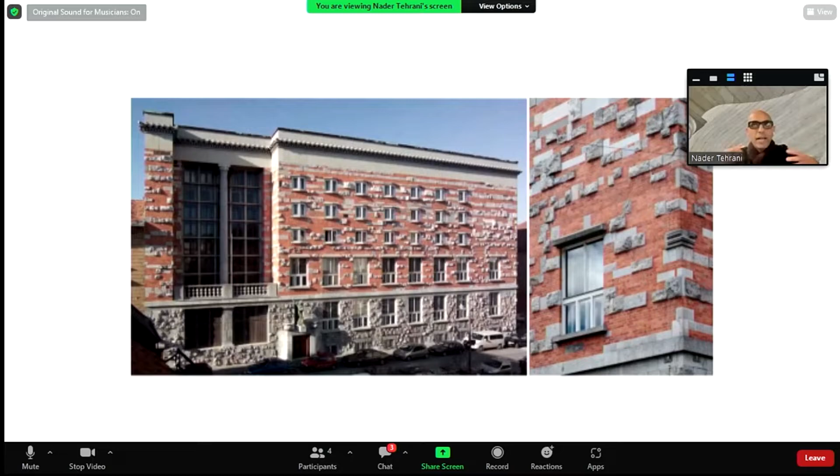I've always been fascinated by the idea of monomateriality, to radicalize architecture through a catalytic detail, the singularity of a certain medium on the ground, on the walls, on the ceilings, pushing them to certain limits, as we can see in Lewerentz. In the rustication of the library walls of Plečnik, we can also see the way in which that stone migrates to the top of the building, allowing us to understand that the catalytic detail isn't an instance in the building, but in fact is its entirety.

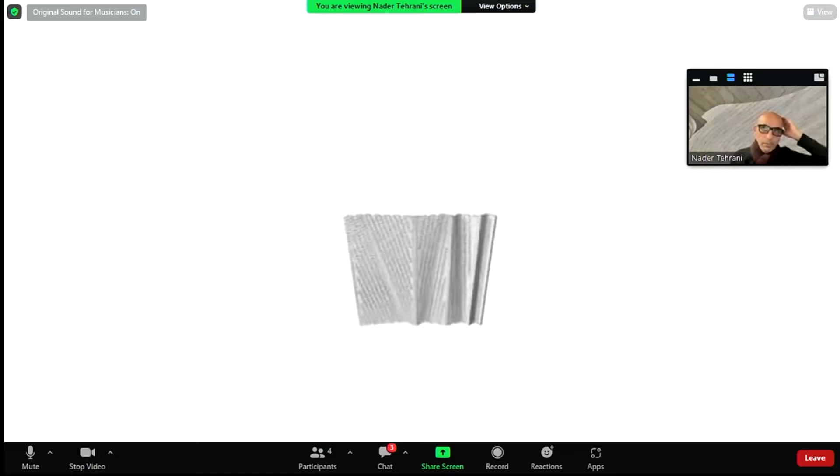In the context of Casa La Roca, we imagined a situation in which we worked not so much with the running bond, nor the Flemish bond, but what we call the variable bond, that is able to slide on the horizontal axis and corbel at the same time. By doing so, we are able to not cut even one brick, but even more importantly, to allow for the passage of light and air into what is a structurally stable wall.

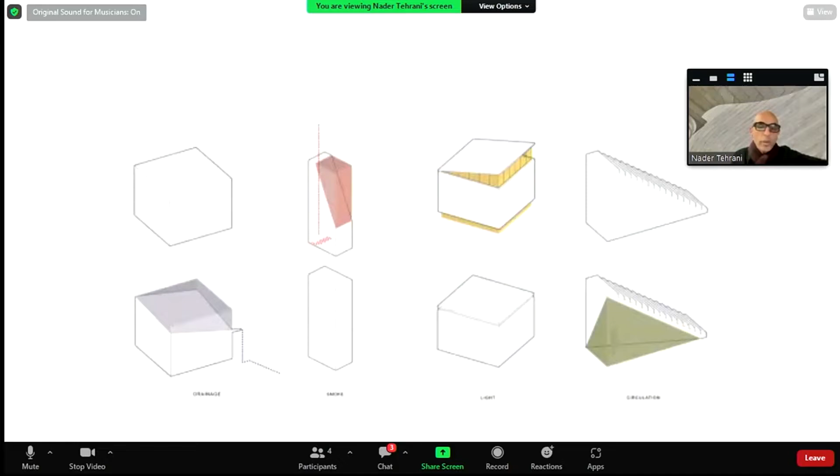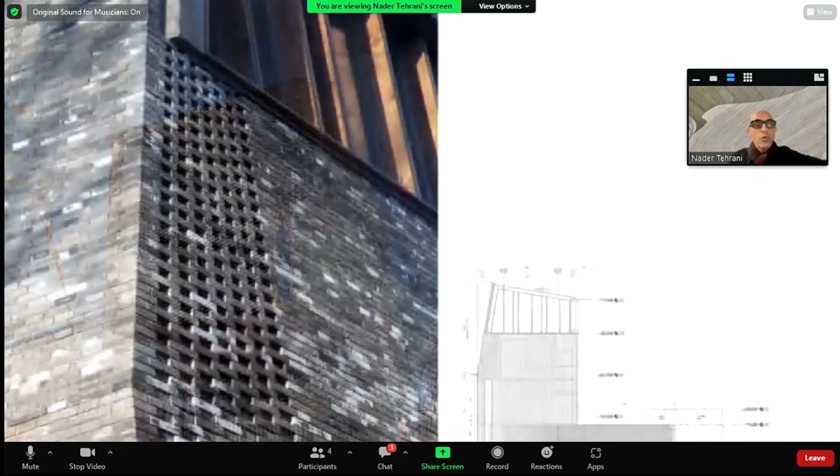Expanding on that theme, we realize this can also become a vehicle through which program can get figured and formed. In the Tongxian Art Center, we're able to take on the requirements of water circulation, smoke, and physical circulation to envelop certain concrete masses, using the brick as formwork to give figurations to an otherwise abstract volume. In this case, the slope of the roof of the gatehouse is really indebted to the compression of the variable bond, tilting the entire facade in relationship to the roof, which propels out the water.

In turn, that variable bond exposes itself for venting on this side, or the turning of a corner on the other side. Obviously, the modularity of the brick, when transformed in scale to some other context, becomes a totally different problem. In the context of CLT, or cross-laminated timber, we realize that the craft of the brick is transformed into

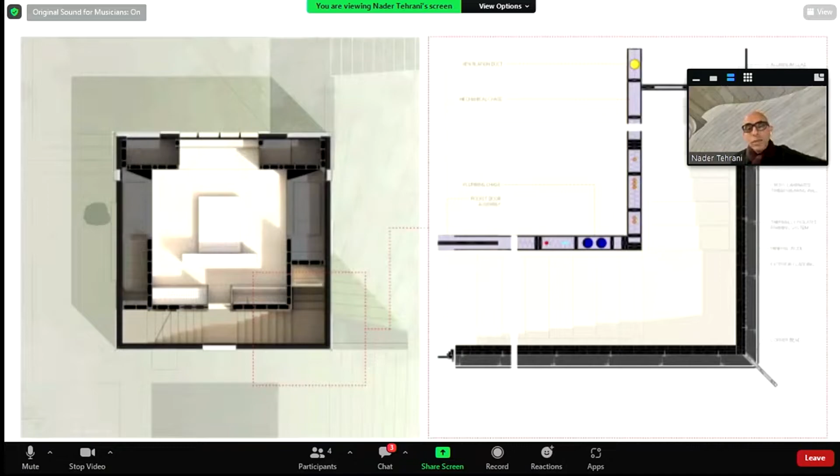planks that are 8 feet by 30 feet in the context of the Connecticut house, producing a monolithic mass of CLT that acts as insulation on the outside, with a sister of balloon framing on the interior, precisely so that it can house all of the systems, be they HVAC, electrical, or otherwise, in a building that wastes absolutely no space.

The circulation not only goes around the building, but gives rise to the poché spaces under and over the stairs, where bathrooms, bunk beds, closets, showers, and all of that take place. A building with no fat, as it were,

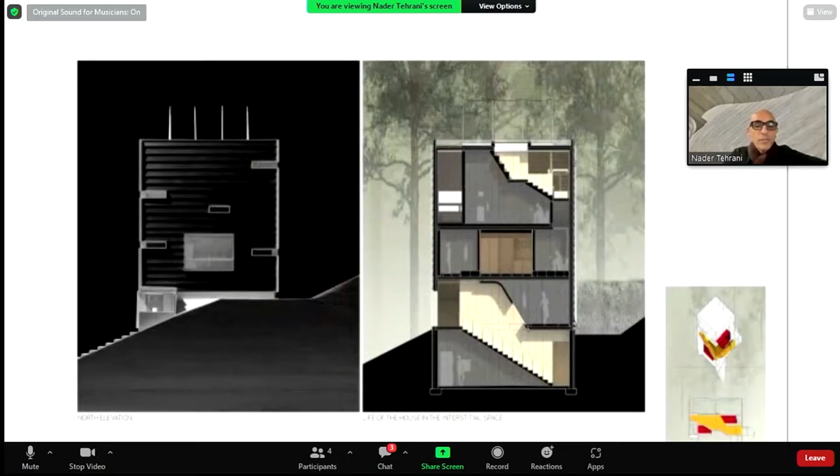allows for an interesting figuration of spaces within the context of the building. Here, the classical room oriented on one floor on the south, then east, then north, then west, is paired up with its sister of the circulation spaces that then have the bunk beds and all of the other features.

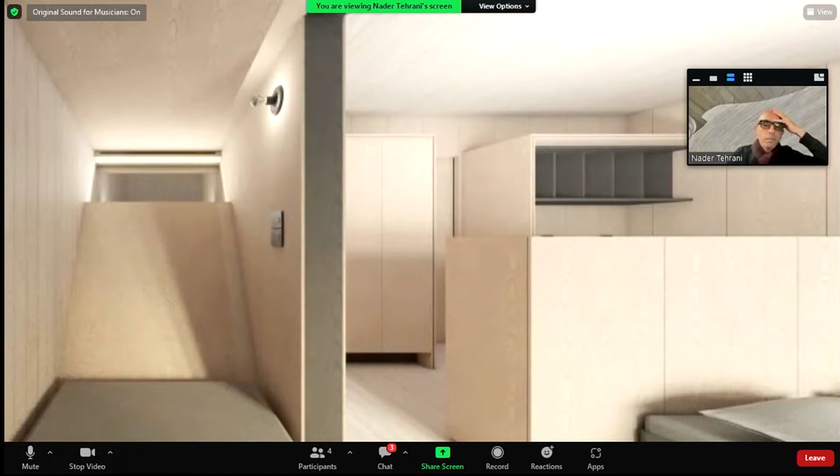Here, then, you can see the CLT on the left, and in the center, the thin laminar conditions of plywood around the studs. Within the context of this discussion, figurations and configurations figure big in this discussion.

There is an ethic in architecture that seeks, in some way or another, to understand how the infrastructure within the building may operate, and how that, in turn, may be separate from what happens outside of the building.

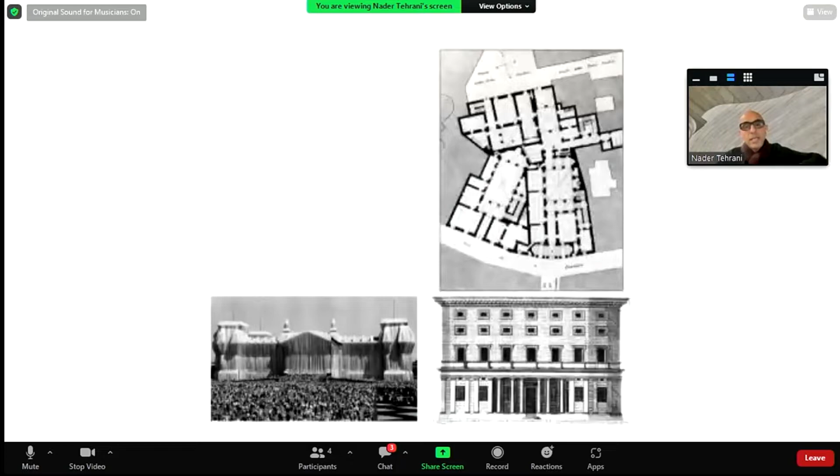Consider for a second the Palazzo Massimo in Rome, the way in which the symmetry on the outside belies the complexity and the organization of the intricate spaces on the inside.

So here we'll inspect a series of systems that are skin systems that form a different kind of intelligence on their own terms, establishing a part-to-whole relationship.

In the context of RISD, where we formed new urban connections from Brown University up to Woods-Gerry, North Hall produces a rather large mass, almost too large for its site.

And for that, we established a skin system, a borrowing of the shingle roofs of its neighbors all around, using that system to scale in a completely new light the shingle systems, this time on the facade.

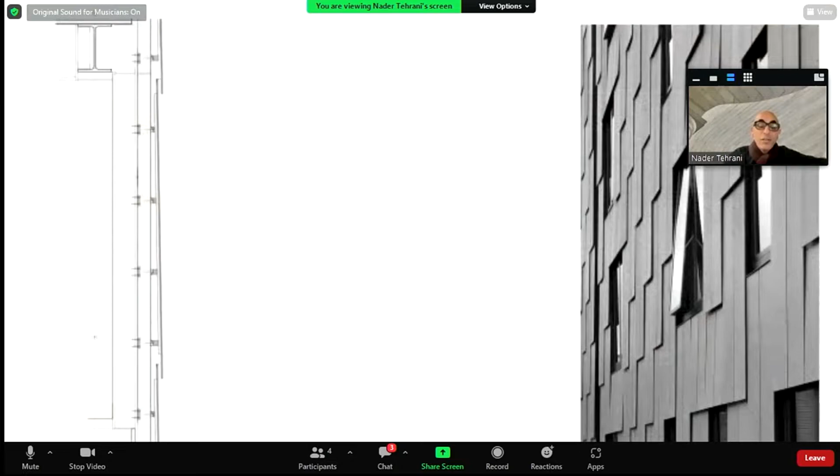The lapping of the shingles, though, are fashioned in a way to mirror exactly the action of the windows that they house. In fact, rotating out just like an awning, there's a kind of monomaterial, monomechanical sense to this facade.

In turn, the massing of this building is then broken down into smaller portions such that the context can be melded into it.

In the context of part-to-whole relationships, the skin is not always just a skin. It can also form a structural part.

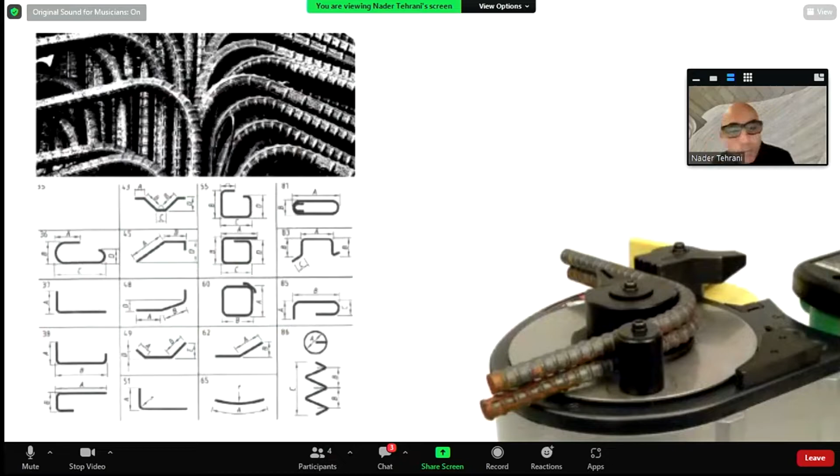Here, in the Tanderrum Bridge, for instance, connecting the Yarra River to the Tennis Open, we decided to work with rebar as a raw system, using the mechanics of bending and a kind of formational and foundational approach to figure out what is the maximum moment.

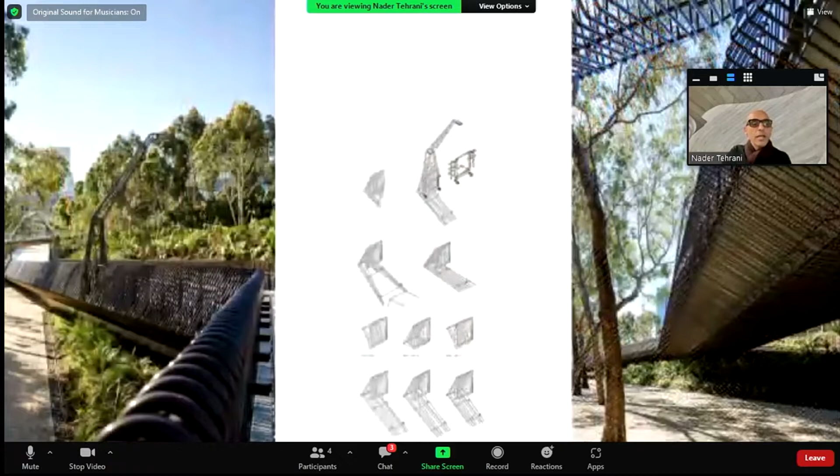But instead of having primary and secondary members, we began to weave the rebar such that it forms both the longitudinal and the lateral strength of the bridge, wrapping around the railing, going under the underbelly and throughout the length of the building, up and over, and even establishing an extension for the lighting systems that speak to the silhouette of the city.

This project seeks to imagine a framework of intricate trellis work that can become structural at the same time.

In the context of the Daniels building, where we extend Knox College towards the north, a lateral shingle system is adopted using thin slips to get northern light into the building.

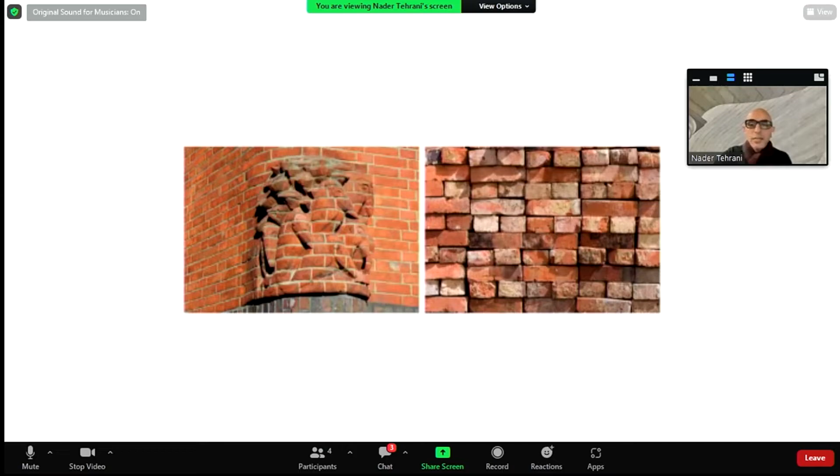But herein lies a tectonic logic also, that some figuration is external to tectonics, as we see on the left side, but other forms of figuration are inherent to the way that brick works itself. This externality and internality can be witnessed in the Weston House as well as Casa La Roca, both referring back to the curtain, but also attendant to their own material conditions. Consider for a second the strength of corrugated copper on the longitudinal axis and its malleability on the horizontal.

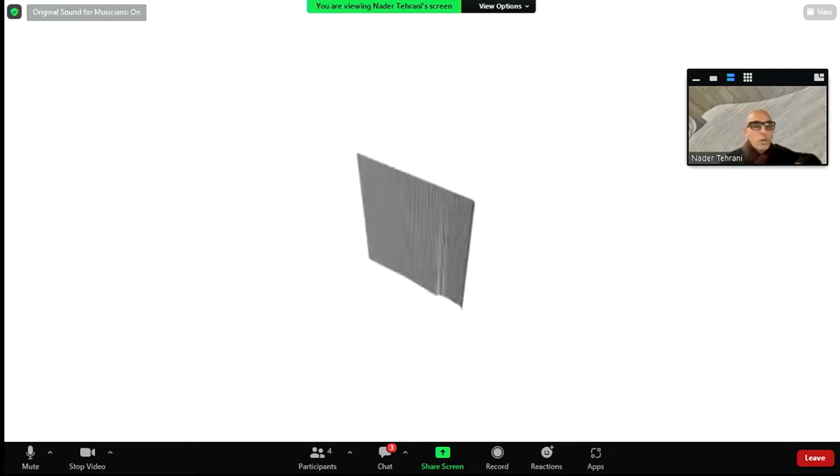Here you can see the way in which the ruled surface allows the line on the top of the building and the bottom of the corrugation to be identical. And once compressed, it allows for a spatialization of that skin to insert a stair, connecting the living room down to the garden.

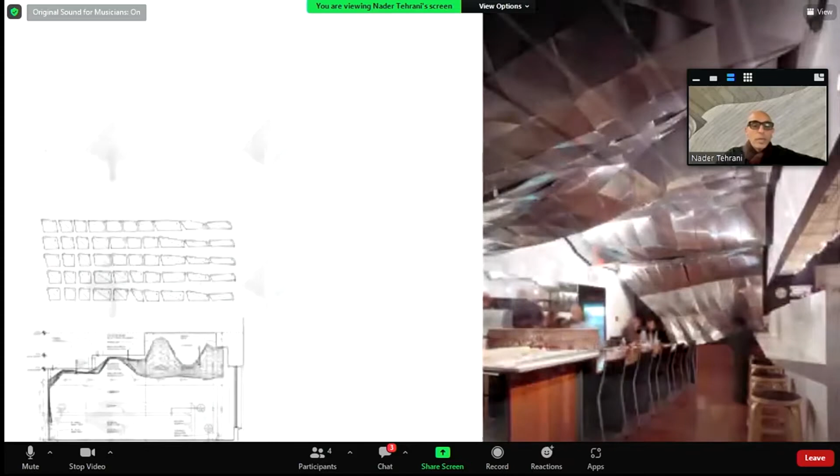This kind of figuration is all about the means and methods of different materials coming together. It can be done as much on a facade as on a ground or a ceiling. In the ceilings we've conceived here, in a pizza shop, in a large dining hall, in a restaurant, all of these are different systems of aggregation housing the organs of the building, mechanical systems, ducts, lighting systems, and so forth.

These imagine a robust sixth elevation, a reflected ceiling plan, which tends to dominate contemporary architecture. Within that context, I would say that the ceiling at the Adams Library has a much more civic role and certainly plays a role in building community.

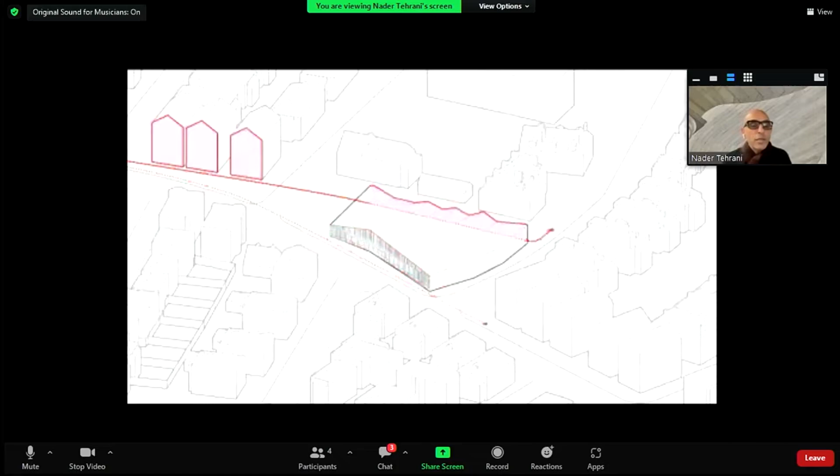The project harks back to a small community in Dorchester, just south of Boston, in which a single-story building is asked to play a civic function on the front, a monumental face, in turn breaking the volume down into smaller pieces in response to the residential scale of the houses behind, allowing all of the water to drain off into a rain garden in the back, carving southern light into the mass while framing a huge oak tree to the north.

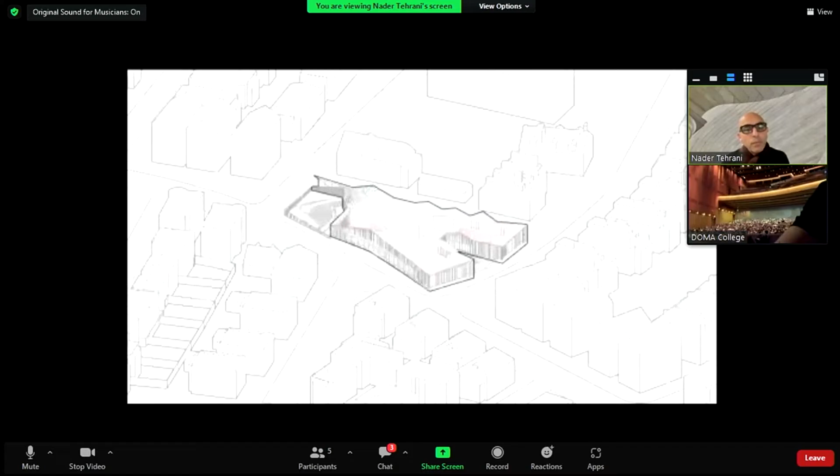While the shelving systems in the three wings are organized north to south, the beams of the building, the reflected ceiling plan as it were, run east-west. And so the building comes together in a kind of organic fashion as one inhabits not only the roof as one looks down on it, but the ceiling as one travels through it in relationship to the outer garden, the outer reading.

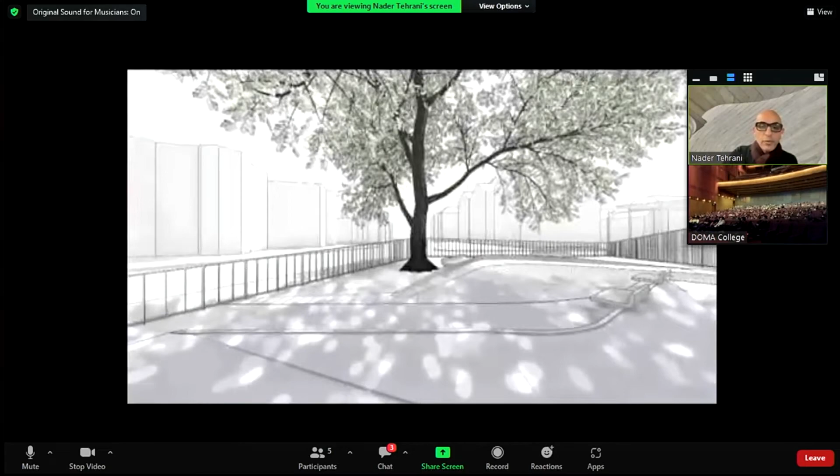The monumental facade on the west end, the broken down facade on the east end, on the interior, the beams, the acoustic panels, the mechanical systems, the lighting, all exposed in their raw presence in a single pitch on one side and the broken down pitches of smaller programs on the opposite side.

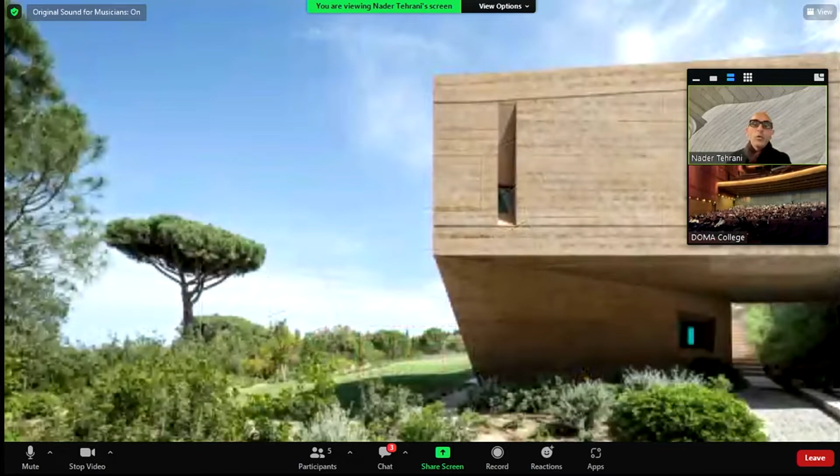Indeed, in this case, the staircase is the structure and not just the circulatory membrane, allowing for the cantilever of the front facade to hold in place.

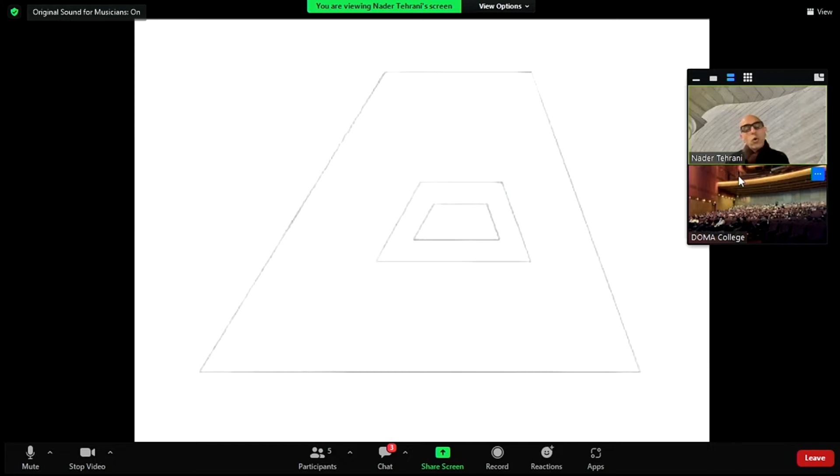So, conceptually, a courtyard building that is able to mutate in relationship to the primary view of the Mediterranean, the internalized view of the courtyard is slipped in relationship to the topography, allowing the terracing of the massing of the housing to gain access to these views.

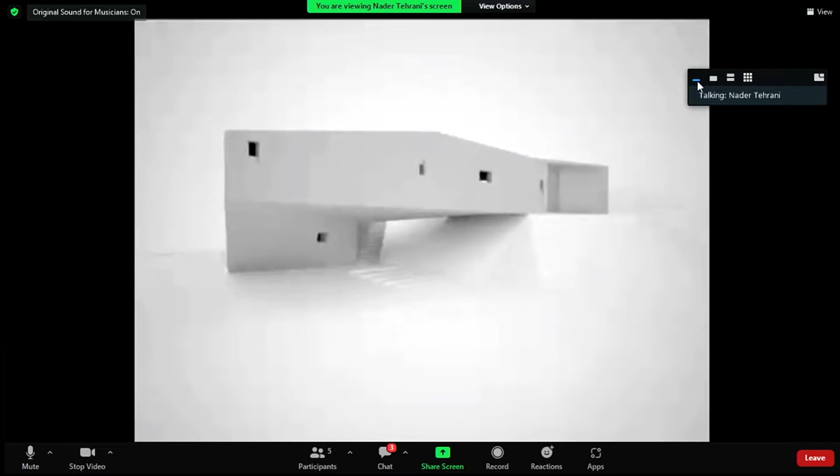In turn, the tilting up of the roof allows western views, while the landscape tucks in and through the building, allowing the green not only to go under the building, but also on the green roof above.

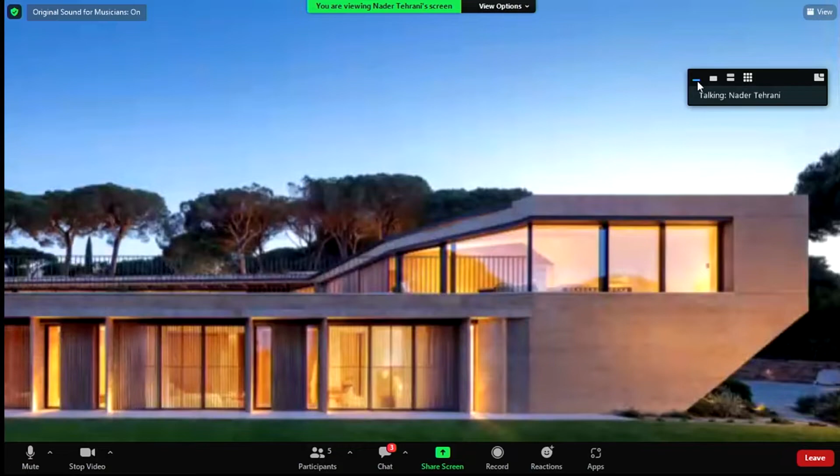Here, built with formed concrete work, you can begin to see also the single slats of wood that form the concrete work in and of themselves. In this instance, the staircase and the roof speak to each other in figurative ways.

Essentially, something like a case study house, just a glass volume. In fact, this is more like a...

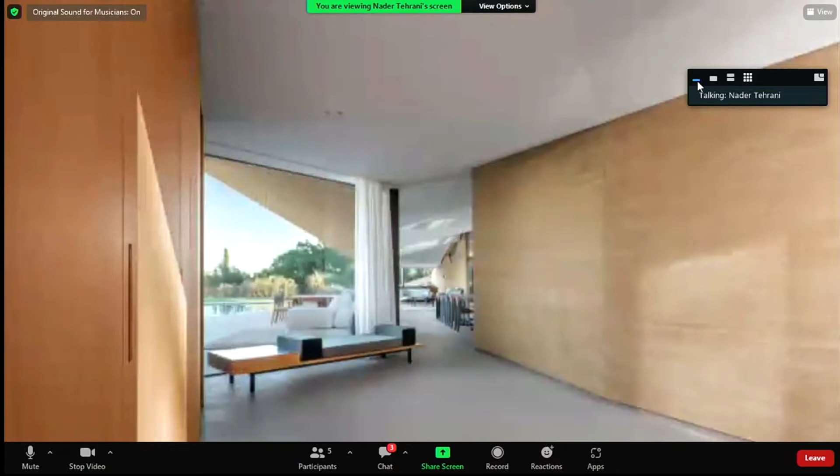Kimbell Museum span, where the vaulting is running the longitudinal axis, allowing for the passage of light and air between the east and the west, framing the pine trees to the west and allowing the figure of the roof to have a structural function while producing a civic space within the context of the main living room.

Within the context of these material conditions of figures and configurations, we witness the tectonic grain, where nature and artifice come together in dialogue. Note the way in which, in Devil's Tower, the vertical surge of these tectonic elements is countercut by horizontal cuts when you see it up close.

Architecture invariably is made up of broken down pieces. The grain of wood is one thing, but the way we cut the wood is another. Consider the board and batten system of the rural New England house, and how that is able to hide all of the doors into the garage. By opting not to put other hardware onto the building, we're able to take the handle and unwind it from the batten system to allow for that passage.

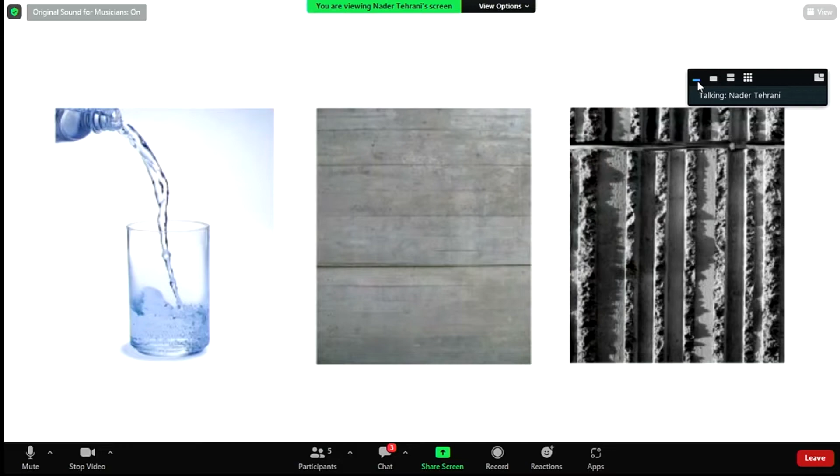That is part of the idea of the tectonic grain. In the context of concrete, that grain is formed either by formwork or by bush hammering, what is done afterwards. The liquid that is the constitution of the concrete doesn't produce the grain in itself. Of course, there are many who've experimented with this, historical and contemporary, from Fisac to Kahn.

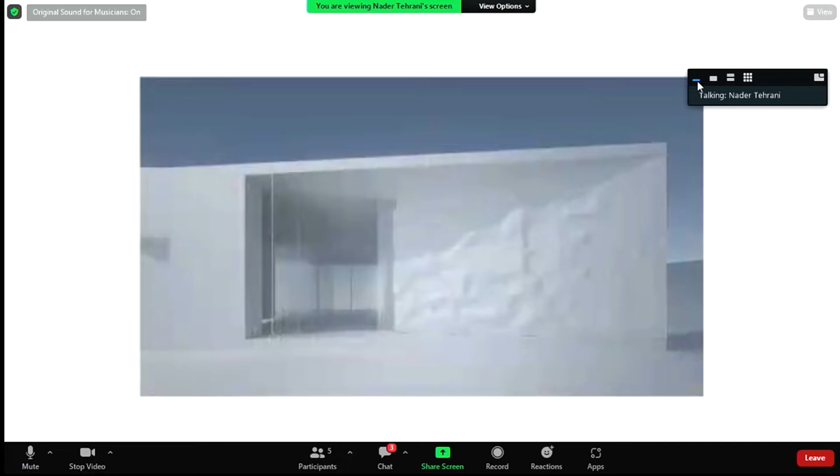We tested two techniques on Villa Le Barroux. One was the fabric form technique, where the smooth conditions of concrete give way to the rustication of large boulders as a representation. Not being completely happy with that, we opted for a technique that we witnessed Frank Lloyd Wright taking on, where the aggregate plays the animate form of expressing the building itself.

The smooth walls of the interior allow for the hand to touch them, for paintings and so forth, but then the aggregate of the outside grows in scale such that there's an inversion between the figure ground of the stone and the mortar, such that it becomes just a generic stone wall within the context of the French landscape. Indeed, like many of our projects, some things don't always happen.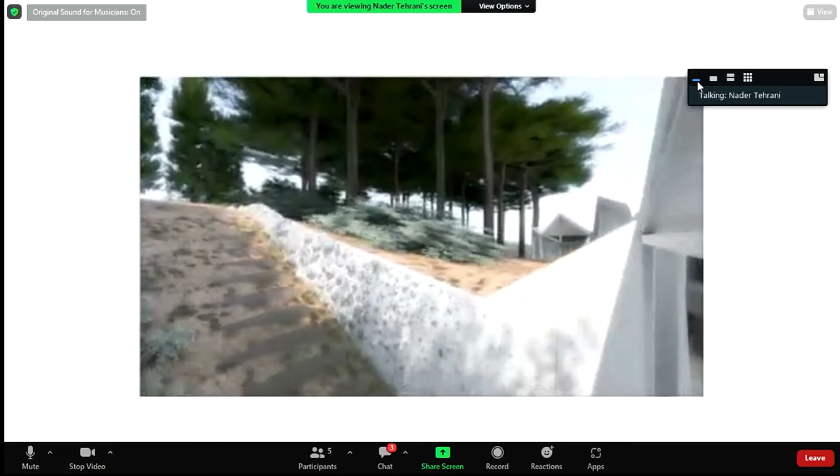By forcing it to be built out of wood, what we did instead is sandblast the wood to such a degree that, in combination with the warm earth aggregate that is part of the soil of the territory, the house looks more like wood than it does concrete.

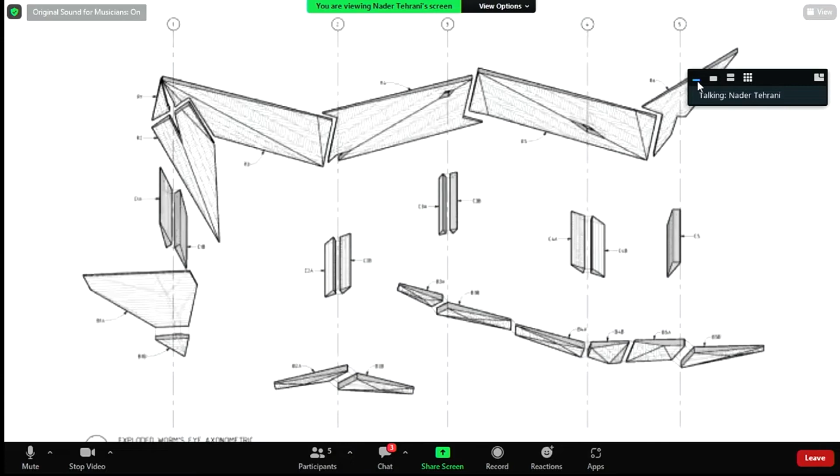This idea of establishing a rapport between the structure and the skin becomes something that we play out in the Venice Biennale. Here, working with cross-laminated timber, we imagined what it would mean to cantilever a single plank of cross-laminated timber in two directions and carving that grain out of the logic of CLT.

The sandwiching of the cross-laminated timber, almost like plywood, the routing of one layer after the other, the thin parts cantilever out to a thin deck, the penetration of the moments in which allow the columns to penetrate, and the neighboring pieces that nest into the sides of the canopy. Here, the patterning of the surface and the structural logic of the cantilever work in tandem.

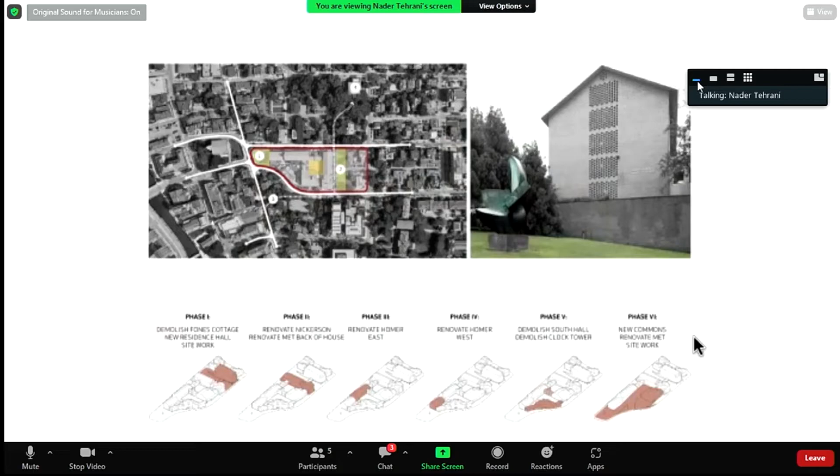Working at RISD, back at the RISD dorms, we also witness another portion of the building that harks back to the tradition of masonry construction. The brick that is so representative of that context finds its way into the base of the building and onto the south facade of the northern dorms, albeit as a veneer system.

One of the challenges was how do you make a masonry system that's so thin appear as if it's constitutionally fat and has weight and density. In the context of the loggia that suspends the connection between the old and the new, we have these massive pylons. But as we go around the building towards the south, the brick plays a role to retain the earth, and it also corbels in and out in precast panels, allowing for that tectonic grain to emerge from the constitution of the brick itself.

Note here that it's not only the brick that has a kind of tectonic grain, but as the slate comes to its ending, the thinness of that veneer system is seen on the end grain of the top of the building, and indeed forms a dialogue with its context too.

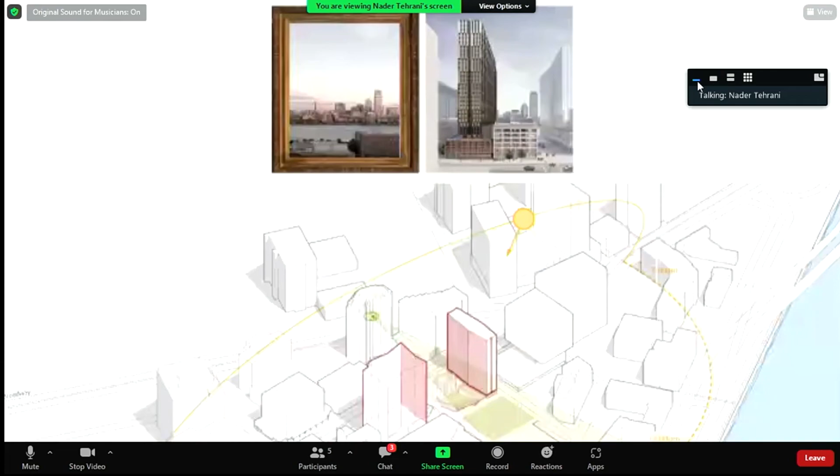This is not completely dissimilar from the MIT project, also running north-south, that has a distinct side panel system concealing a moment truss that supports the entire building, panelized in anodized aluminum work that uses a gradient from dark to light to produce the illusion of great height where there is none.

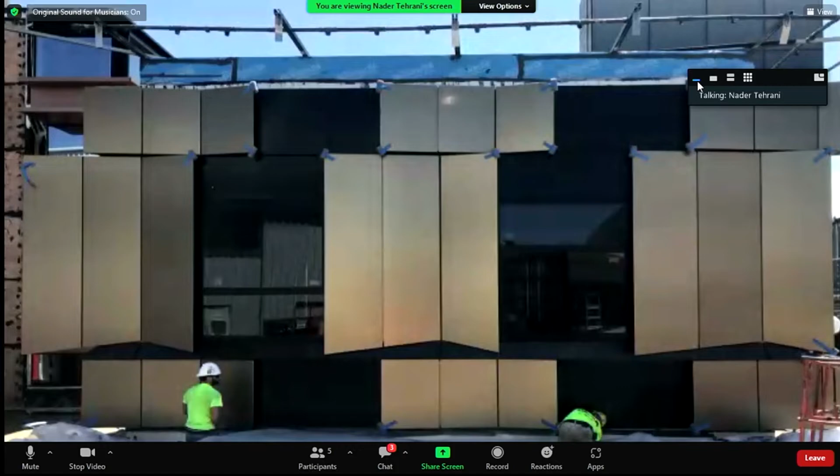Here, the core of the building houses all of the systems so that all of the rooms can maximize best views, and the structure is woven in between the slipped panels, all coming together on a south bay that is more transparent and a north bay that is more insulated.

Here you can see the south, and the figure of the building being the result of the configuration of its structural panels, and on the north, the pilaster systems that intricately articulate the membrane as it addresses Main Street. Now, the idea of the tectonic grain, of course, harks back to nature.

For instance, the striping of the zebra as it finds a way to conceal itself within the savanna. But anybody who knows nature also knows that this is not correct, because the actual tectonic grain of zebras runs perpendicular not only to the torso, but also the legs. The architect's task, most often than not, is one of building these grains.

What we do is artificial, and we have to be attendant to the means and methods of how we do these things. Sometimes we do them through our own means, but very often we do them through techniques of others. In the context of social engagement, our control and our collaboration becomes revealed in the way that we work with and collaborate with weavers, potters, and people that have greater knowledge about areas of urbanism and architecture that is not attendant to our work.

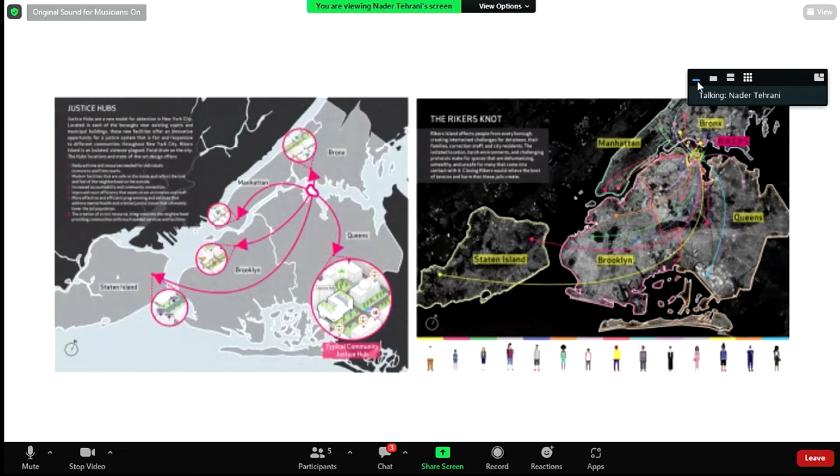In the context of art, we've collaborated with Adam Silverman to produce an installation for the Nasher Museum that probes the way in which his earth, the ceramic, the terracotta that he's working with, comes from soils and areas where artillery have been placed and the earth is contaminated.

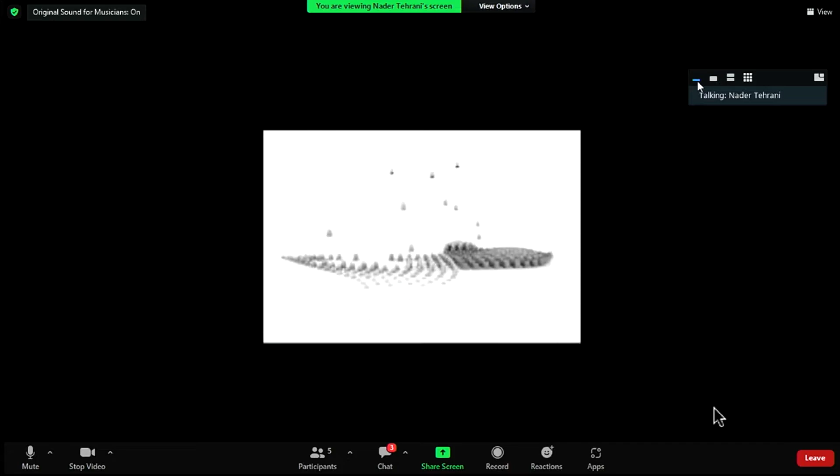Working with the figure of the bullet, truncated to produce different configurations, our collaboration with him allowed this installation to essentially move around into different configurations at any given time, with his craft really as the foundation of that work.

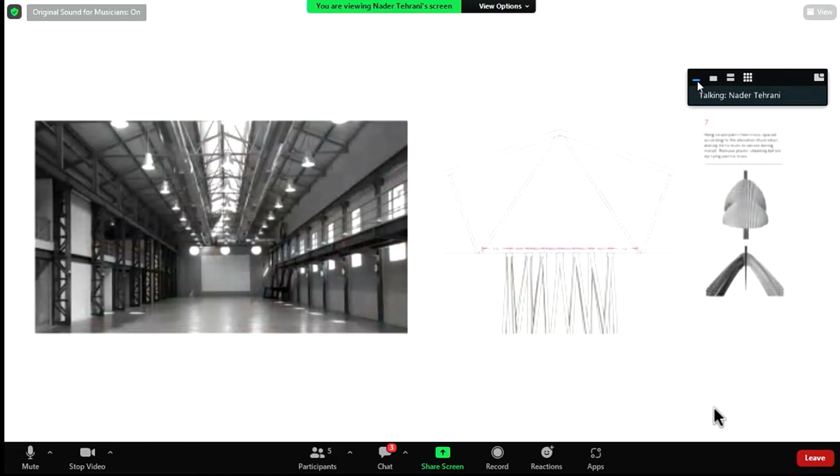In the context of our collaboration with Raya Kassisieh, we worked with her technique of weaving and crocheting, looking at local crafts to build certain units that together, when woven together, can be strung into the warehouse of the Amman Design Week, and in turn gain a kind of spatial quality once they're inside.

But much like other biennales and events like this, we did not want the material to go to waste. So when we took it apart, we understood that the dimensions around which we had to design needed to be functional in the context of the blankets they would eventually become, in order to provide for the Syrian refugees that were its end goal.

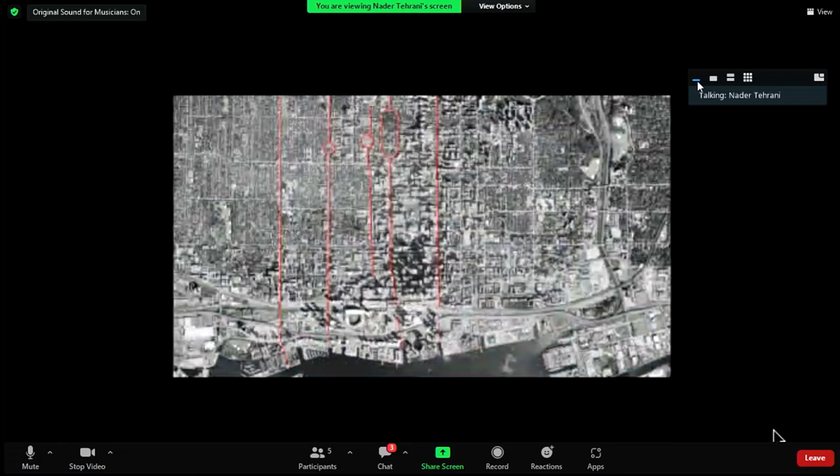In the context of urbanism, social engagement takes on a far larger process. Here, in the context of the Daniels Building in Toronto, we're engaging historic preservation, looking at Knox College, a neo-Gothic building with a spire on its southern side, something to be preserved, indeed enhanced.

Such that the addition we make into the north of the studios is not so much conceived of as a building, but rather as a landscape that, almost like an octopus, spills out and grows in order to reveal the spire intact from the northern face.

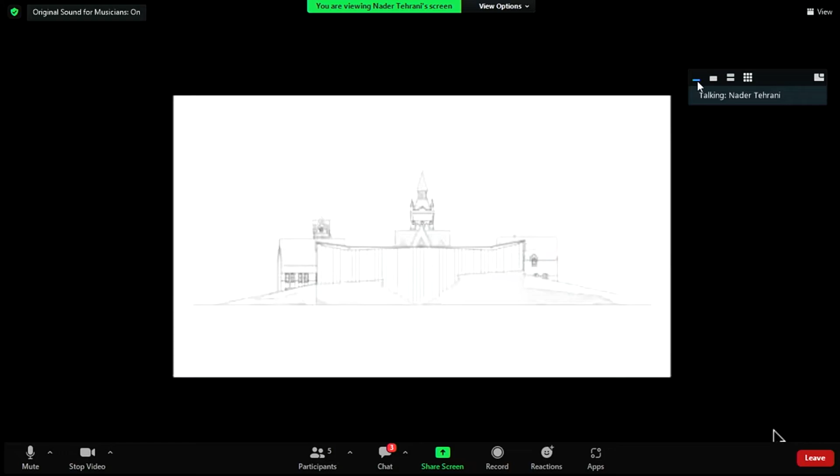In fact, if the main facades of the Daniels Building are on the north and on the south, the actual access into the building is east-west. And one of the huge coups d'etat of this building was that we were able to enter a street into it that is open 24/7.

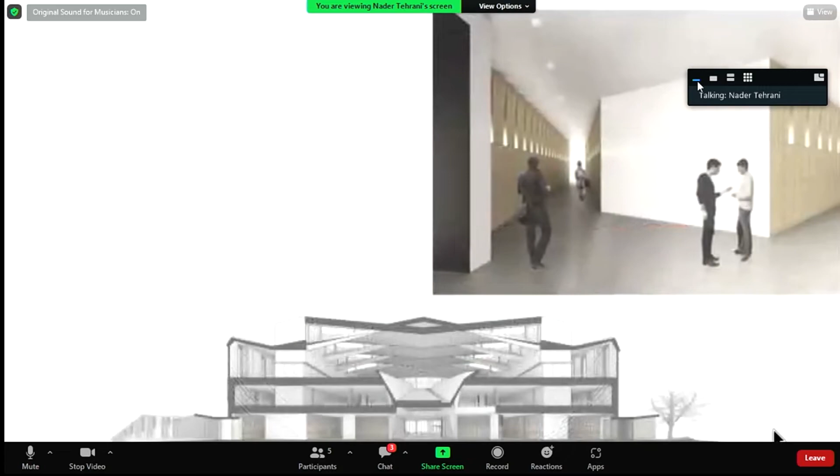Indeed, the entry to the actual program happens above that level. And so the street that we produce within the context of this building houses all of its public facilities accessible to the public: the Fab Lab, the auditorium, the cafe.

But then, as one goes through it, one gets peeks into the studio spaces above, into the Fab Lab below, and indeed realizes that this is part of its urban engagement, inviting the community not only to come inside, but also to be able to work in the building from the outside.

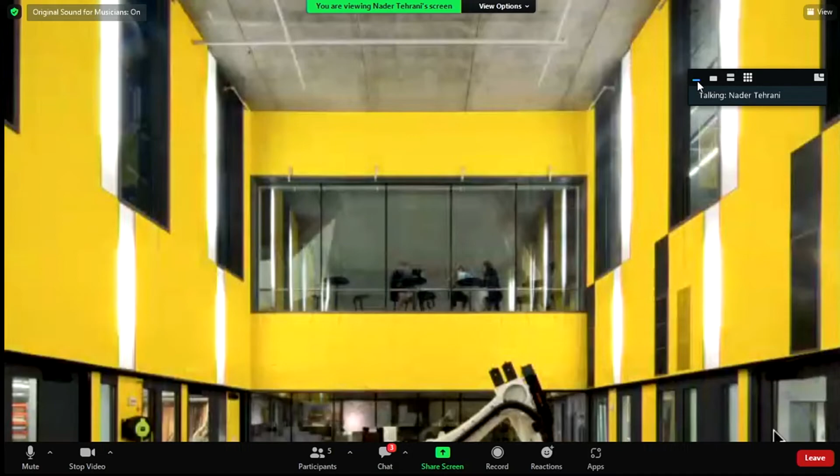The urban connections, the courtyard on the outside, all of these create a porous building that invites the building from many sides, in and out. So though a very volumetric building, nonetheless a landscape building.

In the context of the Adams Library, that kind of social engagement was even frustrating in the sense that we could not design the building alone. We had to design it in collaboration with the community, the elderly, the adolescents, the children, the library community, all the while knowing that the plan of the library, unfortunately, is panoptic because of its security control systems.

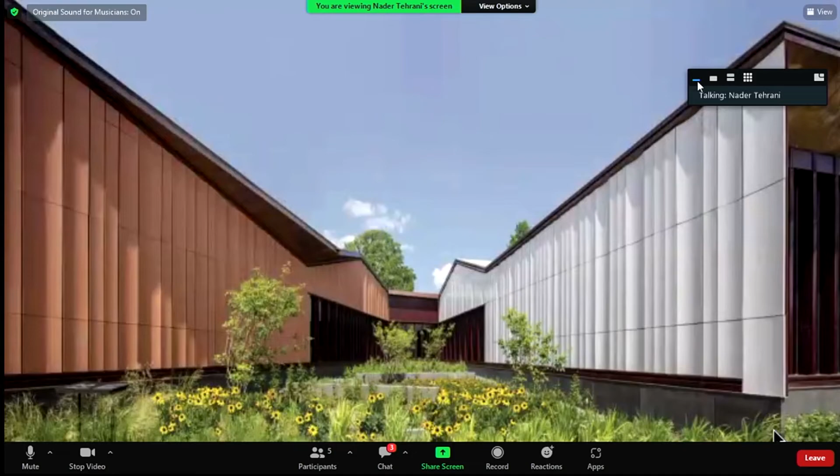But also something that allows for public space on the outside. Indeed, carving the garden on the outside is a central part of how this building operates, using the transparency between the inside and the out to moderate light, but also to create public spaces on the outside. The oak tree at the corner of the building forms the canopy of the outdoor reading room, a major civic space that is open for the community even when the library is closed. This is the contribution back to the community as we articulate different ways it can be used for different political events and so forth.

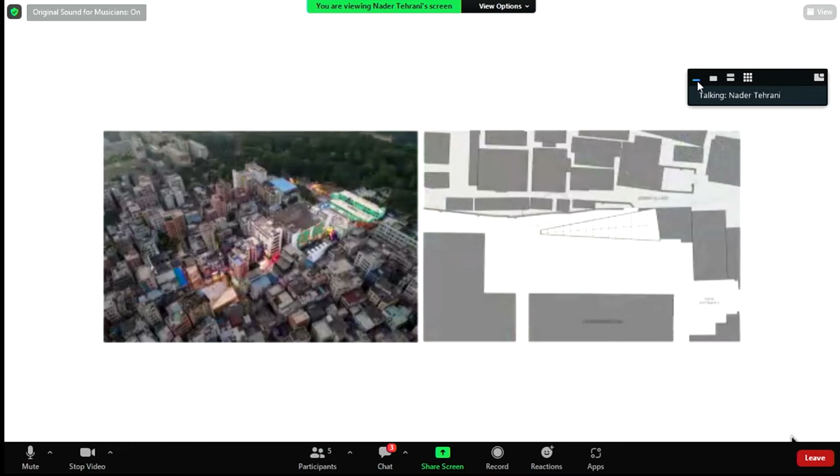In the Biennale in Shenzhen, we were tasked to do another temporary pavilion, but we asked them what happens if this stays longer and actually serves the urban functions that the community actually needs. So working with scaffolding, we developed an elegant structure that through its rotation allows for a space of inhabitation, not just a billboard. And aside from the opening events of the Biennale itself, this allowed that structure to stay on and serve as the canopy for the coffee house and the public markets that essentially happen on a weekly basis within the context of that community.

Sometimes the community and the civic realm don't happen in the center of the town as one expects. In this case, what we were given is a peripheral condition because the center was occupied by an electrical plant. So the public space of the community happens on the edge of this condition, where colored precast concrete members establish a kind of radiant series of colored conditions that mirror the landscape and the programs surrounding the site.

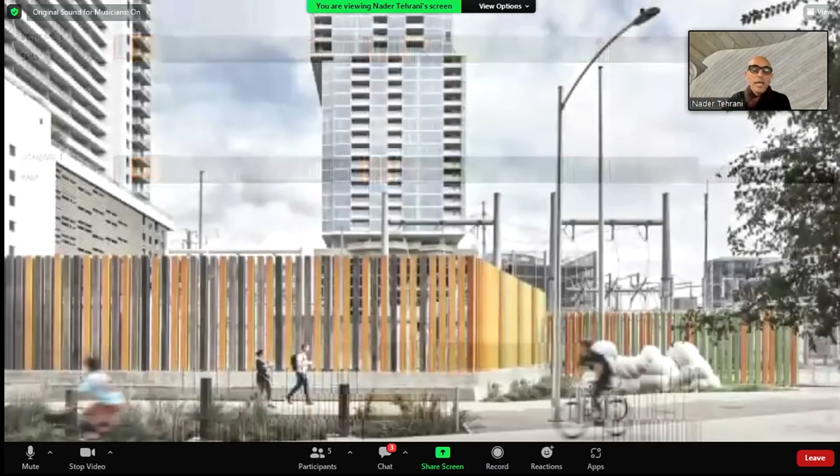So all of this then concludes in the context of political entanglements and pedagogical buildings and how they come together. Some of this comes in the context of means and methods, because architects can only designate design intent, but not exactly how things are built. Other times it has to do with the way in which public projects become entangled by processes that the architect can no longer control.

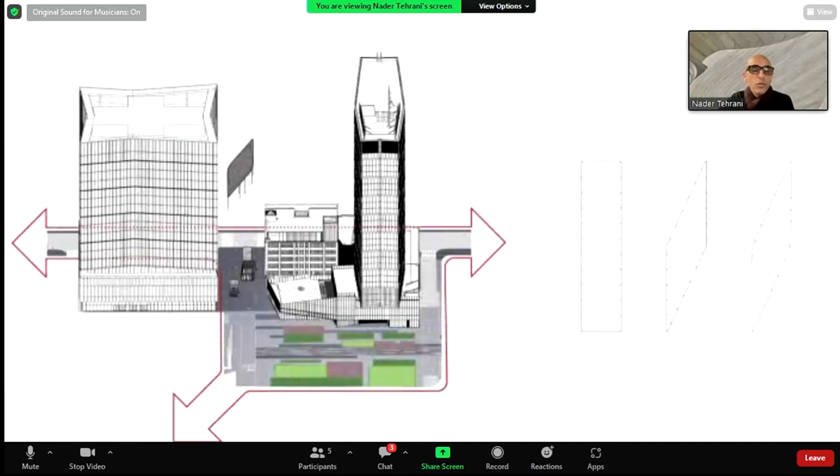Here, in the context of MIT, we also won the commission for the gateway that is not only connected to the campus, but also to the MBTA systems and the subway systems, essentially making for an entry into the MIT campus. While all of the elements that connect to the subway system are grounded, a tall canopy system of 25 feet plus straddles the top of this, allowing for the passage of the public to come in and through the building.

Fabricated here just last week, delivered to the site on the Charles River. This is a project that is being clad as we speak.

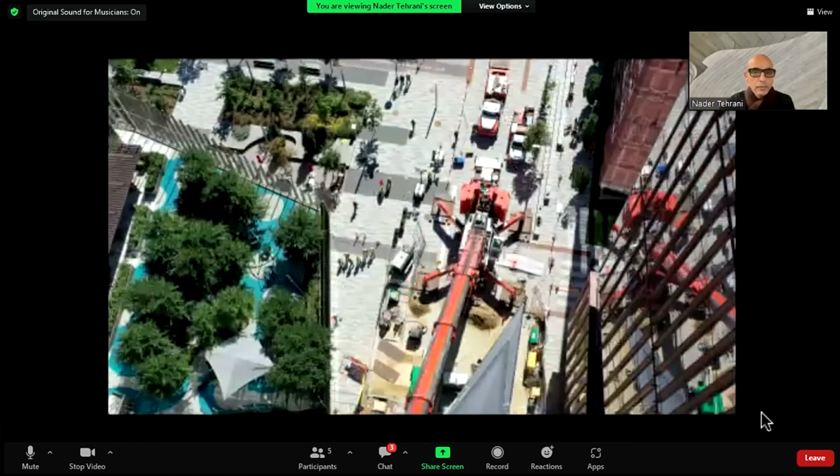Here a shot from yesterday, where the gateway will be opened in about a month or so.

The idea of urbanism, in the context of political entanglements, is core. Here, at the core of the Melbourne School of Design, we were tasked to build essentially an architecture building with a studio on top of it. They never had dedicated studios.

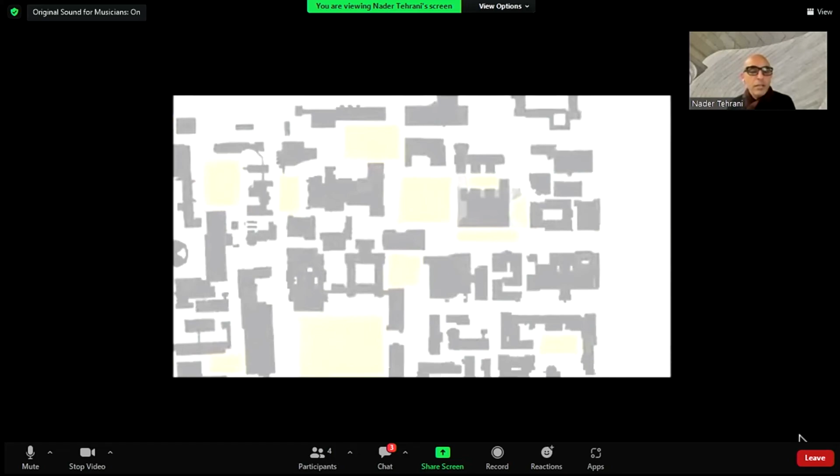We came to understand that as a mat building, the building had the prospects of a huge public space within its core that responded to the neo-Georgian courts of the exterior of the campus, and that core of that building would serve a vital thing within the context of this building.

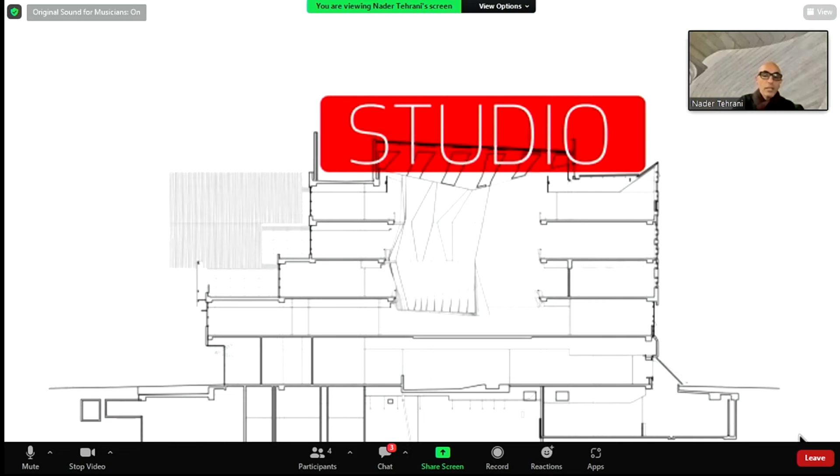But the challenge of the building really occurred within a political context of the studio being canceled. And because it was canceled, we as architects had to develop a way in which we would maintain that program, not horizontally, but possibly vertically, robbing an extra space off of the corridor to make committed spaces of studio within the context of circulation, and then borrowing classroom and research space for when the studios needed to expand.

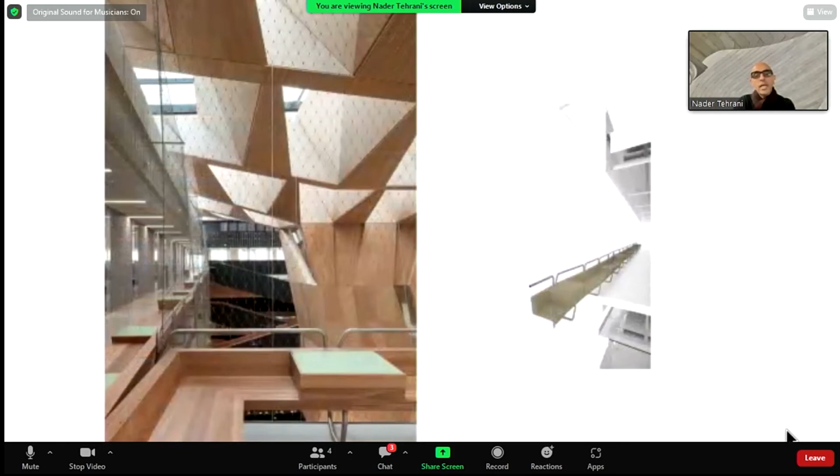Then taking the budget of the railing of the atrium and putting them back into the FF&E budget to produce collaborative desks, drafting boards, and crit areas that all come together in the context of a vertical studio hall.

In the context of the Daniels building that you saw earlier, the studio hall was also about to get canceled, essentially with the contractors telling us that our forms were unbuildable. When we showed them the work of Felix Candela and the ruled surfaces of shell concrete work, they simply said it was too expensive and a million dollars over budget.

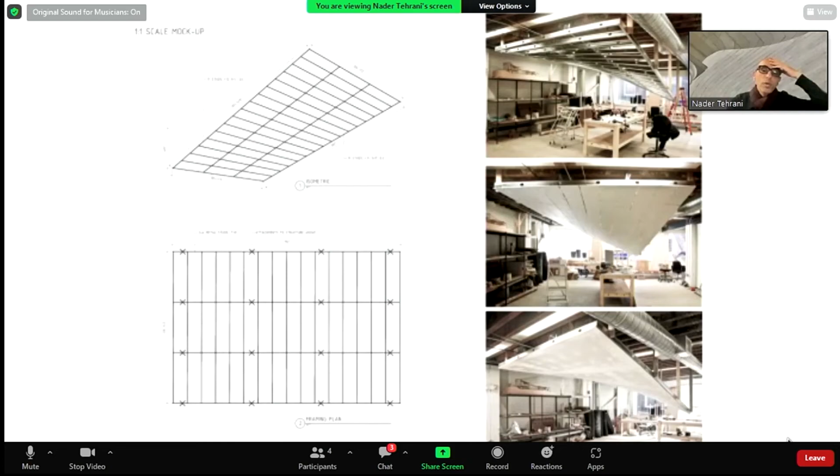Part of our political engagement is also to build. In the context of our own studio space, building a stick version of that concrete, we were allowed to insert radiant panels within the chipboard, bringing the budget down to $800,000 in a ruled surface built up by steel members plastered over with the heating system on the inside. Of course, all of that connects back to the auditorium you saw earlier, the studio space, and the Spadina building.

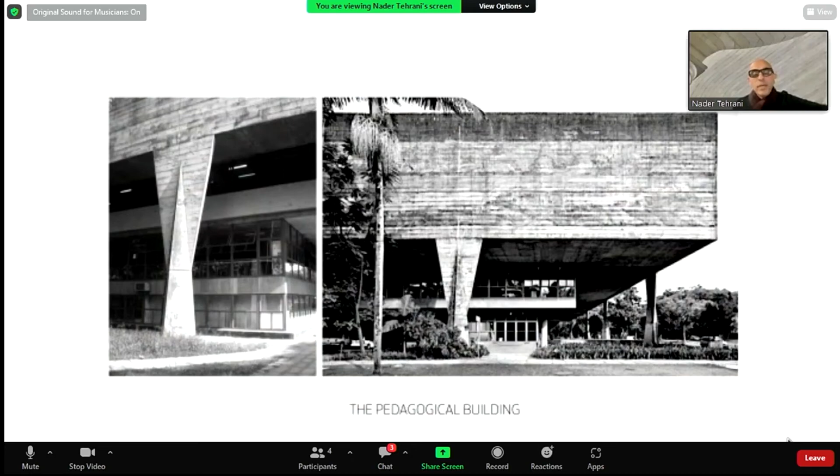The pedagogical building is at the center of what you and I do, in the sense that when we build schools of architecture, we're not just building spaces of learning, but by virtue of what we do, we have a literate audience. So all of the details become didactic in their function. That is really how the three schools of architecture evolved for us.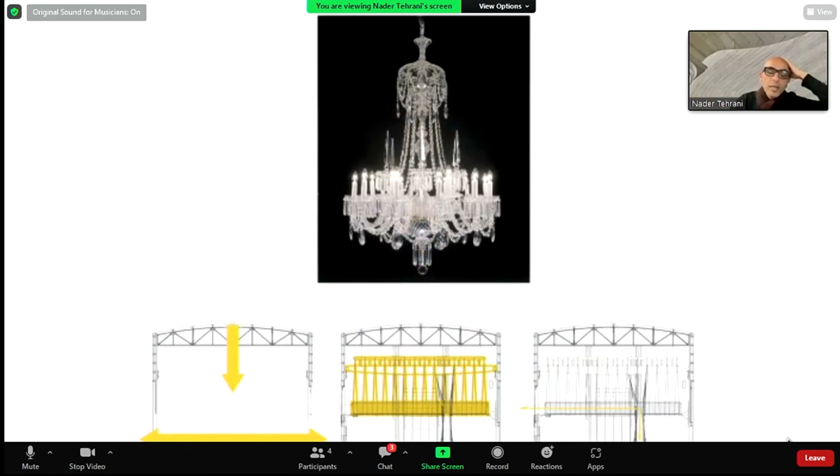In Georgia Tech, even though it was a renovation of an existing space, we were tasked with making a flexible space. Part of that flexibility, in our minds, was the idea that we could develop a floor system of electrical hookups, but that nothing else touched the ground—everything was suspended from above. The truss and the gantry crane from above let the desks underneath be really free; if you wanted to empty them out for large constructions, you could. The crib for added studio space, the second means of egress, and the lighting all get suspended from above, allowing for the kind of flexibility that a space like this needed.

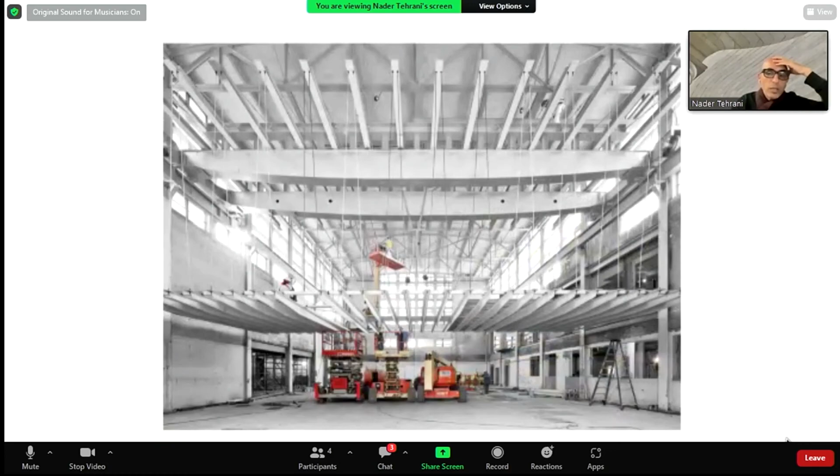It was a very, very low budget project. We even ran out of budget when we were polishing the existing sign of the building, where we transformed the research building into an architecture building.

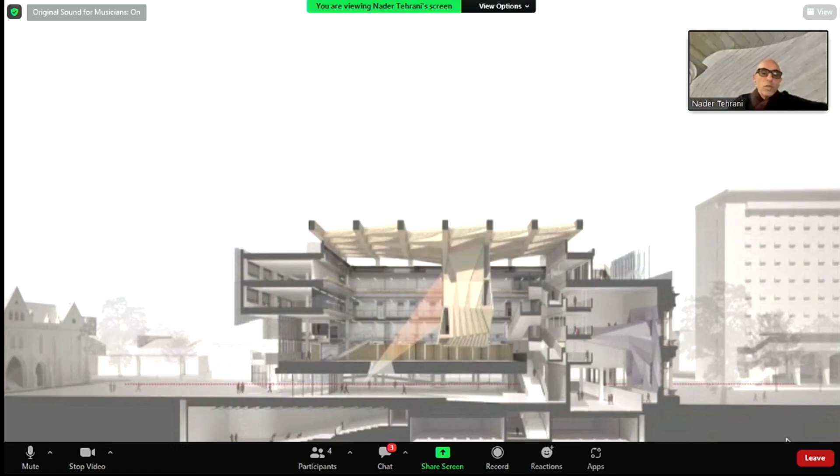Back to the Melbourne School of Design, the center studio space is the key space in and of itself. The roof comes to confluence with a dedicated studio space suspended in the middle—iconic, much like many of its predecessors, but diverging from them by bringing the roof and the spaces of that structure into confluence. Spanning 22 meters from side to side, the depth of this structure is over 3 meters, also rotated to the south so that you get natural light but never direct sun.

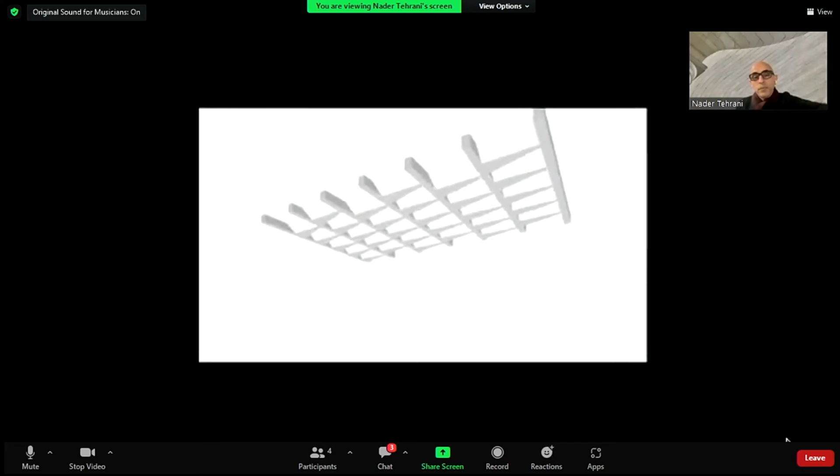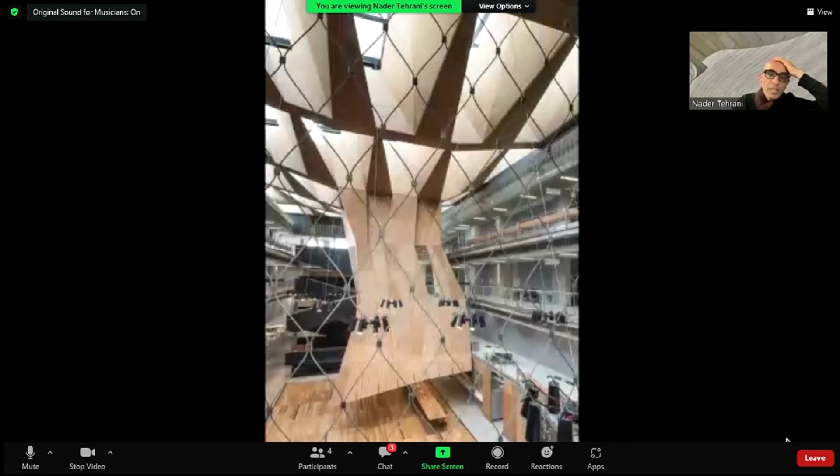From that, a massive system of spatialized wood frames spaces of studio, becoming thinner and thinner as it goes down the surface, suspends above the public space of the courtyard within. It's important to remember that this is an inversion of the classical system of rustication, whereby rustication is massive at the base and thin at the top. We're using massive members at the top and thin plywood at its base.

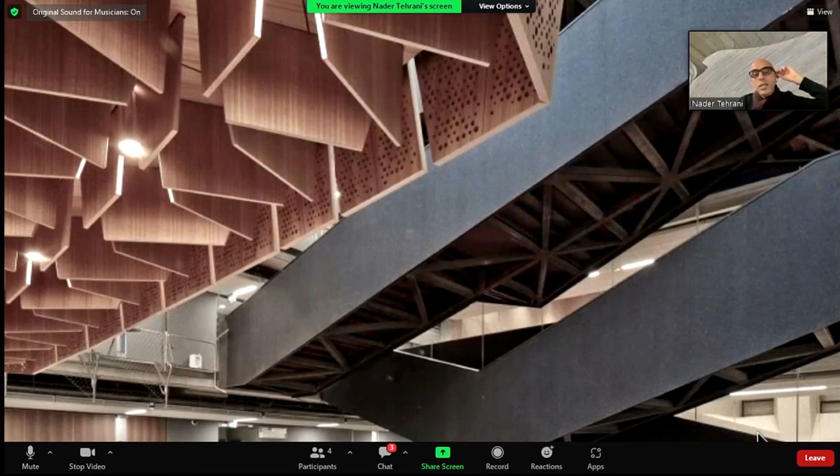At the top, indeed, you occupy the massive space—you are in the truss itself. But underneath it, you witness the acoustic panels and baffles that, in a way, articulate the acoustic environment of the spaces in between.

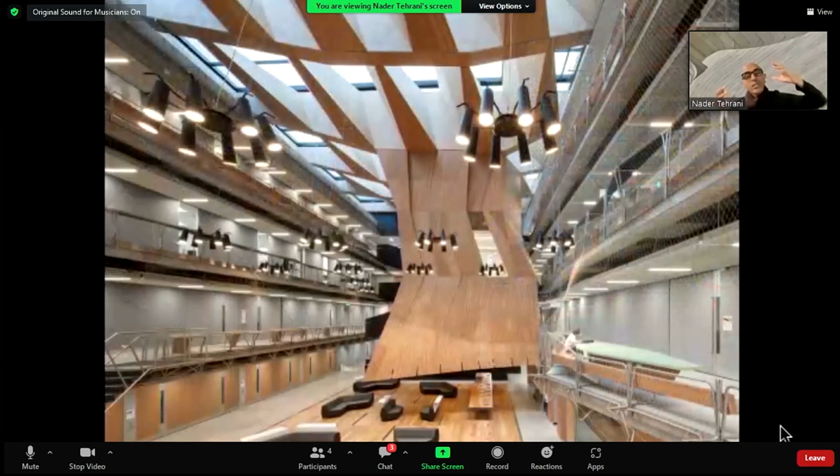Built almost entirely off-site, prefabricated, everything of this project was delivered in the wee hours of the morning to produce what is an interior space destined to become an ideal space for interdisciplinary communities between architecture, landscape, urbanism, and planning. So successful is that space that the entire university is using it, much to the dismay of the designers within the building, who often can't get seats within the context of the atrium when it's fully occupied.

With that, I thank you so much, and it's been a great pleasure to be part of this event.